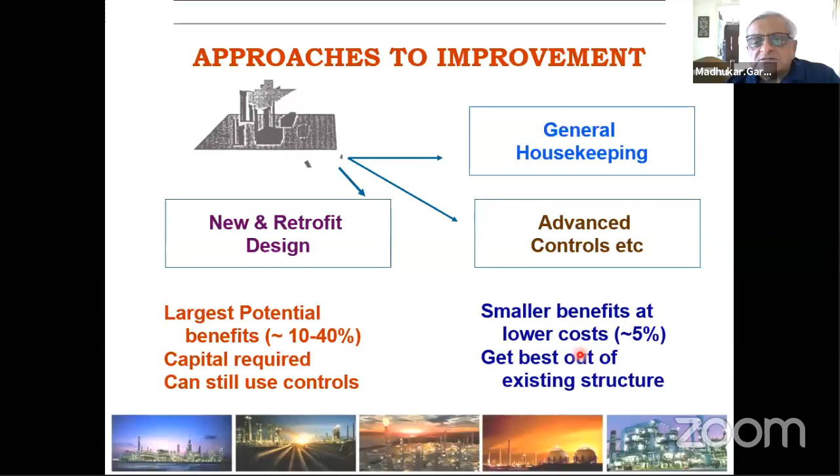Sometimes it might violate the max limit, which means the product becomes a little impure. For example, if you're separating benzene and toluene, benzene purity in the merchant market needs to be about 99.995% pure, so any small toluene ingress would make that product unmarketable.

So the operator generally keeps the set point pretty low compared to the actual limit, and is quite happy to let some benzene go along with the toluene. That's a kind of loss in production, which can be avoided by raising the set point if we have better control.

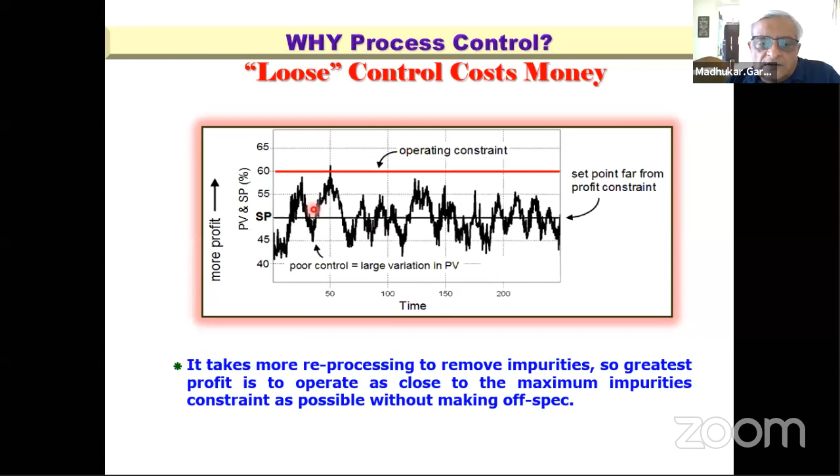So when I talk about control and advanced control, this is not just theory—it is something in practice, and more importantly, it gives money. At the end of the lecture, I will teach you how to calculate benefits of advanced control even before implementing it.

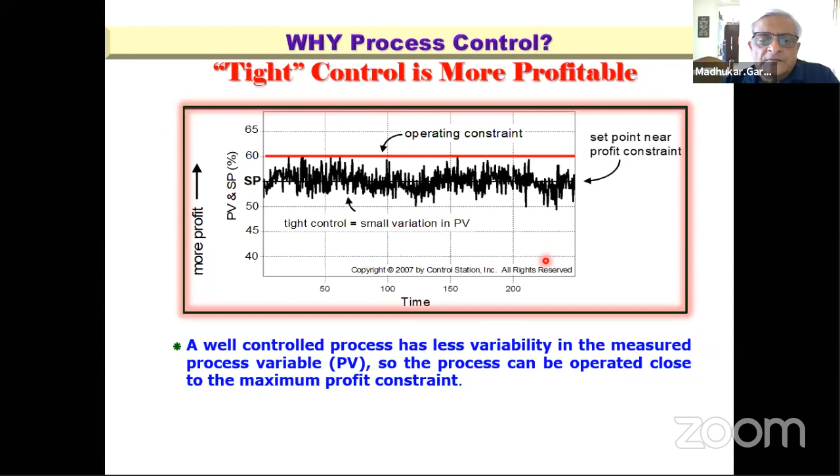Management generally likes to have an estimate of the cost-benefit ratio before approving a project—what the capex and EBITDA will be, and capex over EBITDA, which gives them an idea about rate of return and net present value. Normally that can't be done unless implemented, but the good news is you can calculate estimates before implementing advanced control, which I'll talk about later.

Today, all the control rooms in almost all industries, whether it is fine chemicals, pharma, and more importantly in refining and petrochemicals, are provided with DCS, what is called a distributed control system. But this has actually evolved over a period of time.

If you look at how control room instrumentation has evolved, up to the 70s, you'll be surprised to know that all the instrumentation in the control room was mostly pneumatic and panel mounted on the wall. These control rooms had a big wall on which the entire semi-graphics of the unit was displayed, and all the PID controllers were pneumatic, in the sense that the signal coming from the plant was a pneumatic air pressure signal, compared with the set point, and the output signal was also pneumatic air pressure. I'm old enough to have actually seen this happening.

Most refineries actually had a pneumatic control panel mounted system till the 70s or even late 70s, and I've even operated some plants using a pneumatic control system.

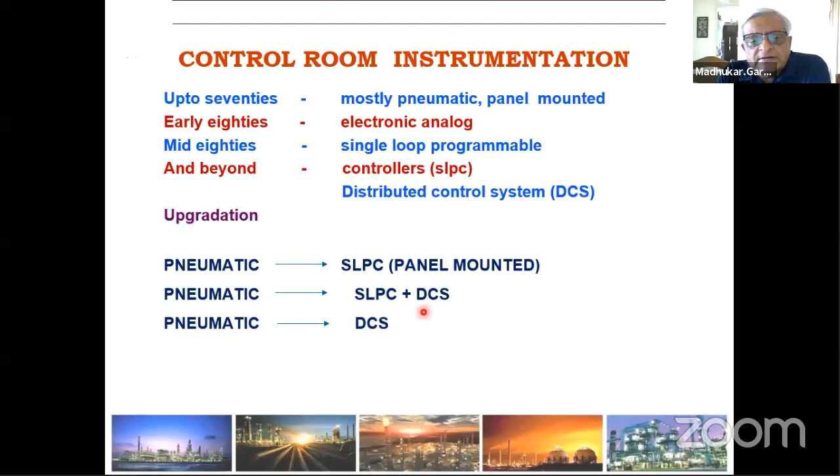Later on, as a new generation of operators started to come in, DCS was added to the SLPC, and today, as I speak, we have DCS.

So how it went about is that this is the field—this field is nothing but the plant. It could be any plant: a crude unit, vacuum unit, FCC, naphtha cracker, anything. From the field, you have four types of signals: flow, pressure, level, and temperature, which come in.

There are two types of control system in control room instrumentation. One is the open loop, where flow, level, pressure, and temperature are only indicated or recorded for the information of the operator. The second is the closed loop, where these signals come in, are compared with the set point, and the deviation or manipulated variable is sent back to the plant to operate a control valve. So, the control room instrumentation is either open loop like this, or closed loop.

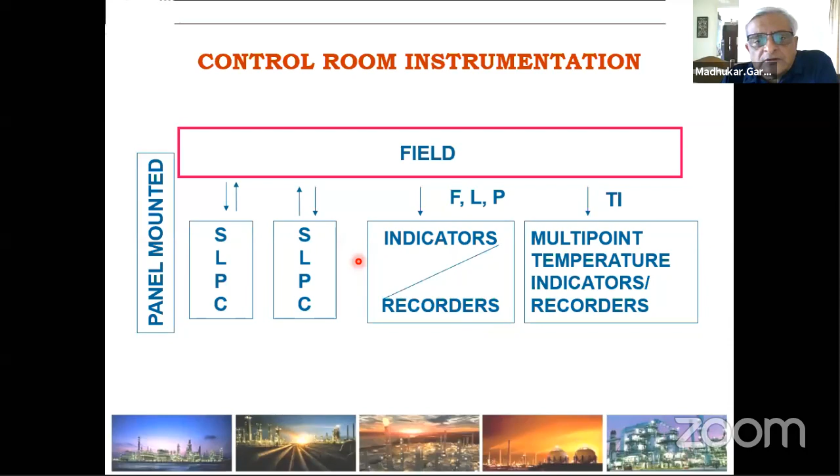This was the panel mounted first upgrade. Later on, this was combined along with the DCS, what we call the operating station. The operating station is very similar to a desktop computer. There's no difference, except rather than a simple PC, it is actually a workstation. Most of these are HP workstations with tremendous computing horsepower.

Feeding these operating stations is what is called a control station and monitoring station. The difference is that the monitoring station takes the open loop signal. So in addition to flow, level, pressure, and temperature going onto the panel, they are also fed into this monitoring station, which in turn feeds its data to the various operating stations.

Sitting in front of these operating stations are the operators who look at this data in various formats displayed to help them control and operate the plant better. The closed loop is actually piped through the SLPCs.

Into the control station, which contains the PID controller also. So to some extent there is redundancy provided. In case the control station goes down, the operator can still operate the plant through the SLPC, and that also feeds to the operating station.

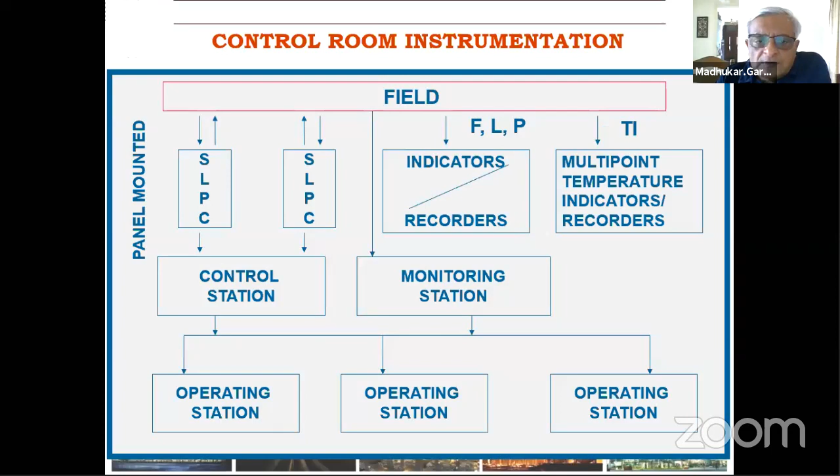This went on for quite a while. In fact, some refineries, including the two here in Mumbai, Bharat Petroleum and HPCL Mumbai, still have a configuration like this. But slowly they have moved to something like this picture, where there is no longer panel mounted instrumentation anymore.

The data from the plant is fed directly to the two stations, the control station and the monitoring station, as shown earlier, without the middle layer. That data is then sent to the operating station, and you can add other modules like an application module or a supervisory computer to that.

The control station now takes more responsibility, because if it goes out of order, there is nothing to fall back upon. So we provide a duplex control station, that is two CPUs in parallel. If one CPU goes down, the second takes over, with hot data transfer between the two. The on-time availability of the current DCS is measured in the fourth and fifth decimal, around 99.99995%.

The reason is that we can't afford any of it to blank out, because then the operator has no way to know how to operate the plant, and the plant can get into a dangerous situation. So it's important to remember that if the distributed control system had not been invented, there could be no discussion about advanced control, because advanced control sits on these operating stations and control stations.

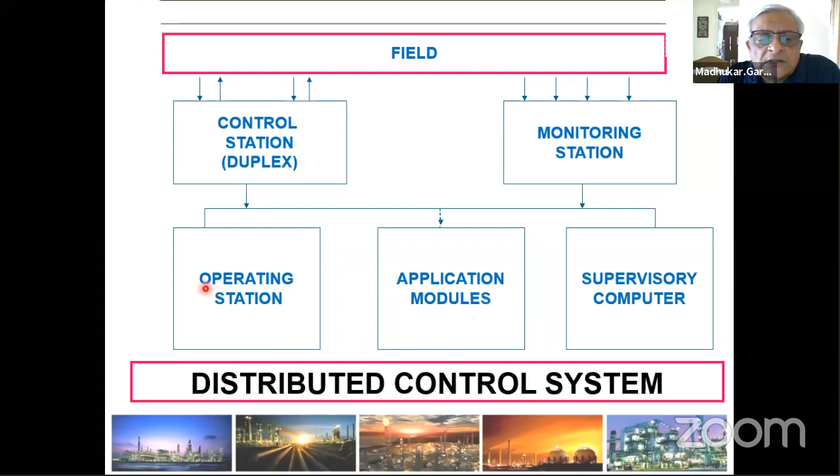What is the benefit of digital control, the way we saw it? Of course it has enhanced data accuracy, because now you have much more accurate data in real time. So if the temperature is 98.5, it will show 98.5. In the good old days, the operator guessed it was somewhere between 96 to 99. So the data accuracy has improved.

Very fast response time, because we're looking at electronic transmission from the plant to the control room and vice versa. Very easy access to plant data - you can actually record and store data for the last 10 years, and recall these files the way you recall files on your laptop or computer. So there is no need to keep track of ledgers, folders, or hard copies anywhere - this is all available electronically.

More important is that this media provides facilities for plotting, trending, and even storing process data. So if you want to determine the effect of one variable on another, you can transport the data into Excel and plot and trend it, or even do the plotting and trending on DCS.

To my mind, the most important advantage of digital control is the ease of control of configuration and tuning. What I mean here is that the plant is never steady. Over a period of time, it goes through revamps and modifications, and one of the modifications generally done is that we change the control system.

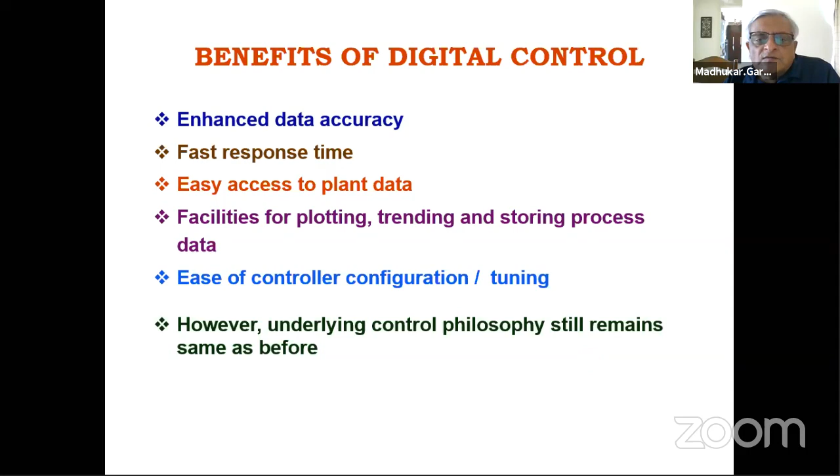And what is that? It's the age-old PID controller. PID stands for Proportional Integral Derivative Controller. Since you all know about it, I won't explain it fully, but let me tell you some of its major features.

You have a process which is the inherent part you want to control. Let's say this is a pipe, and this pipe is the process where you want to control the flow through it. So you have a measuring element, which could be an orifice plate or something, which measures the flow of the fluid, and that is the process variable.

The PV value, process variable or present value, goes into the controller, which is the PID controller. It compares the PV value with the set point given by the operator, and uses the PID algorithm. I don't think we have the time or the forum to discuss the PID algorithm in detail, but it uses that algorithm to calculate the manipulated variable move, which is downloaded onto the control valve, and the control valve opens or closes accordingly.

So if the flow is higher than the set point, the control valve will close, and vice versa. This is what's called conventional single loop control, and it has been around since time immemorial. In fact, since the first plant was constructed, the PID controller has been there. It's the major workhorse of anything that moves—whether it's a plant, a ship, or even an airplane. The PID controller is a workhorse.

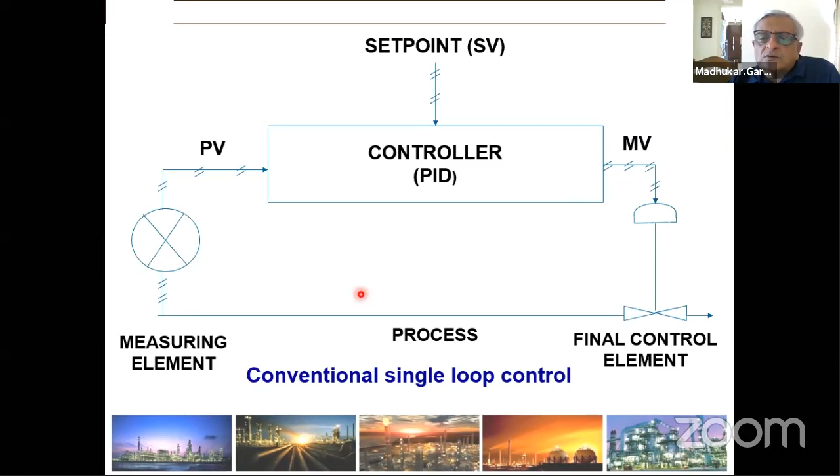Limits and constraints cannot be handled. For example, if the process variable is very low compared to the set point, the signal from the PID controller is to open the valve. Now if I keep opening the valve continuously, the PV value still doesn't reach the set point, and the valve is fully open. So this controller doesn't know that there's a certain limit beyond which it cannot open the control valve.

So such limit constraints cannot be handled. If there are significant time delays in either measurements or process response, it destabilizes the loop.

In other words, suppose I have an online gas chromatograph. By the time the sample goes into the coil and into the column, and by the time it actually enters the detector and the signal comes back, there could be a significant time delay. Now that is something that cannot be considered. It cannot be handled by a PID controller.

The other aspect is that it cannot handle interaction with other loops. It knows only its own process variable, its own set point, and its own manipulated variable. It doesn't know what other loops are doing, and obviously the plant is integrated, so any action by any other loop will affect this loop as well.

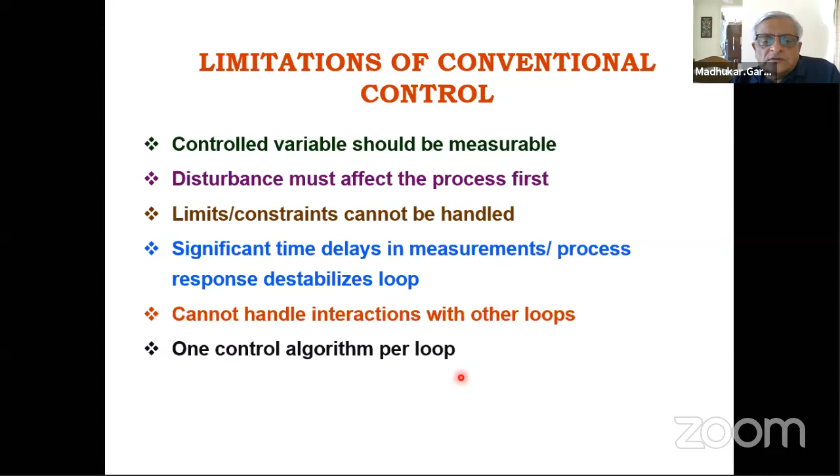So that's a big constraint, and as you know, inherently there's only one control algorithm per loop. So tomorrow, if I want to change the gain value, or if I want to make sure that the PID controller doesn't operate for some reason, those kinds of algorithms cannot be built into this. It will only operate at one algorithm at a time.

So given all these constraints, and knowing that the PID controller is a faithful workhorse, what is the next logical step that we should do? Obviously, since there is tremendous computing horsepower available in the DCS, the existing features can be used for control beyond conventional control, and that is called advanced control. So anything beyond a PID controller, even a ratio controller, is called advanced control.

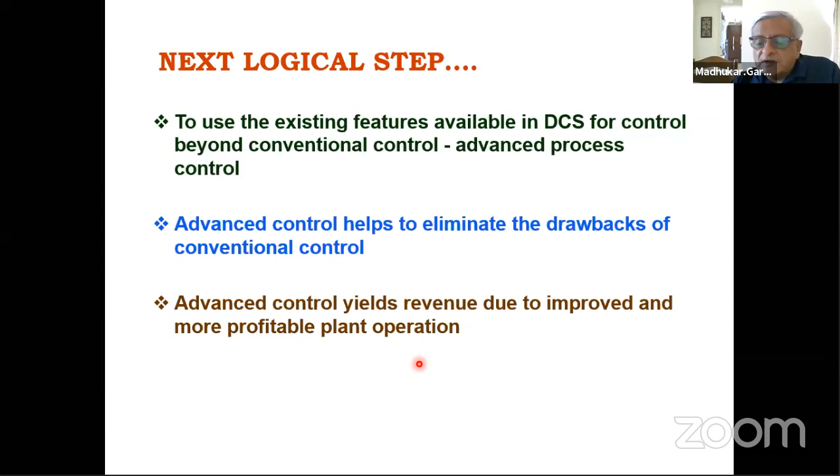It helps to eliminate the drawbacks of conventional control. Not only that, it helps you to make money. As I mentioned before, I will tell you how you can calculate benefits due to advanced control. In almost all cases, you can estimate the advantage of advanced control even before implementing it. Let me give you an industry scenario as to why advanced control is required and is a must in the industry today.

See, for example, even if you employ the most sincere operator, he will make adjustments 5 to 8 times per shift. Even if he's very dedicated, sincere and knowledgeable, it's very difficult for him to make more than 5 to 8 adjustments per shift in one parameter as what he thinks is best. This is underlined as per his perception, and this kind of adjustment can vary from person to person.

Obviously, there are 3 shifts in a day, so there are 3 different people in a 24-hour time frame. So from one shift to the other, the situation can change, and therefore you need something more consistent. Advanced process control fills that gap because it can adjust multiple parameters, not one at a time, but every minute, as per the agreed objectives to maximize productivity and profit.

What's important is that it is independent of the person. Whoever is sitting on the panel to operate the plant doesn't really matter, because advanced process control, based on the objectives decided by higher management, will always drive the plant to its maximum profit objective. This cartoon tells you the whole thing very succinctly.

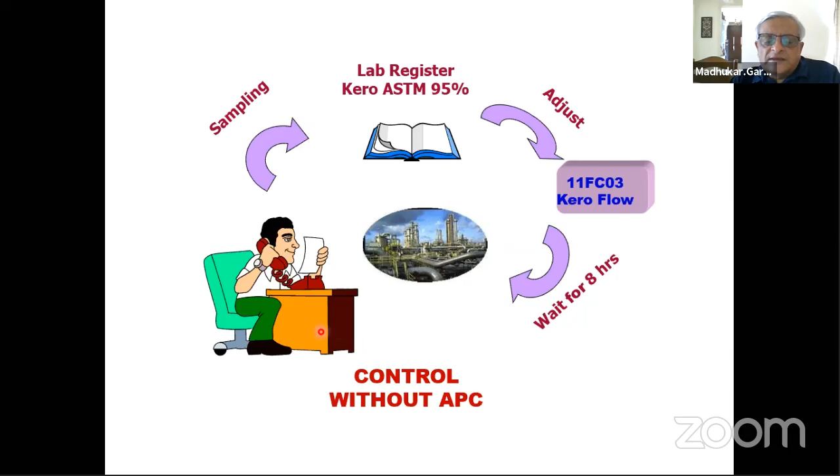Then based on that data, and what exactly the company wanted, the operator used to adjust operating conditions in the plant, and then wait 8 hours before the result was affected — whether the change made any difference — and then take a sample and send it back to the lab. And the loop closed. But today it's not exactly the same. Today, the Kero 95% point can be estimated; it cannot be measured.

There is no measurement device by which you can actually measure the 95% point of Kero, but it can be calculated online, and that can be displayed to the operator. Based on that, he can adjust the kerosene flow out every once in a minute, and this whole loop of having a lab, etc., is completely eliminated.

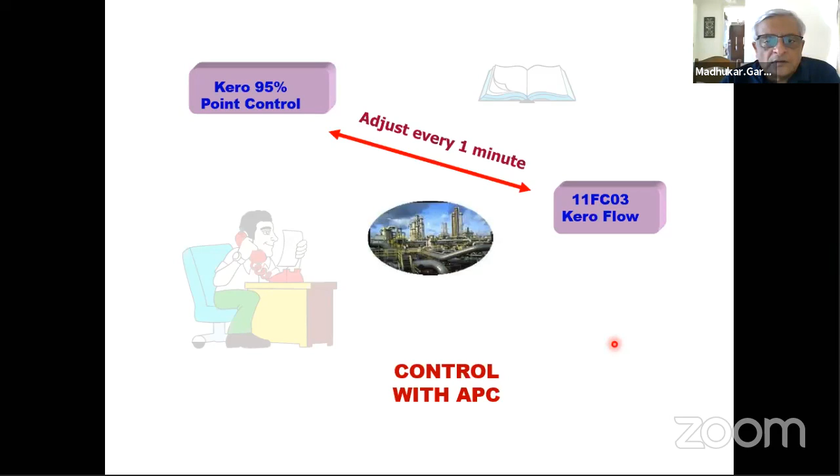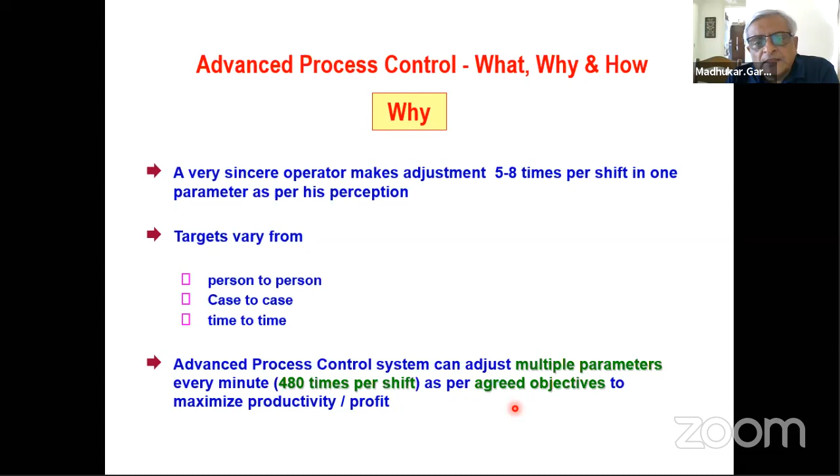This is actually what I call digitization in the real world in terms of optimal operation. Now, before I get into the nitty-gritties, I've discussed why, but now I'm getting to the what, and later on I'll talk about how. If you remember, there was a slide where we said what, why, and how. I think very important is why, and I hope I've convinced most of you that advanced control is a necessity rather than a fashion. After convincing you on why, then we talk about what, and then how.

So when you are actually operating a distillation column and you're trying to control the overhead temperature, the pressure, etc., what exactly you're trying to control is one or more of the chemical engineering operations in the plant. It could be either a mass balance, a heat balance, reaction kinetics or reaction engineering, or vapor liquid equilibrium, or a combination of them. So it could be thermodynamics or catalysis or kinetics, heat balance or mass balance.

And these are all the subjects that we teach and we learn. This is actually what defines chemical engineering to a very large extent. So please always remember that whenever we try to control these 4 variables, we are actually trying to understand the chemical engineering background in that process and trying to control that part.

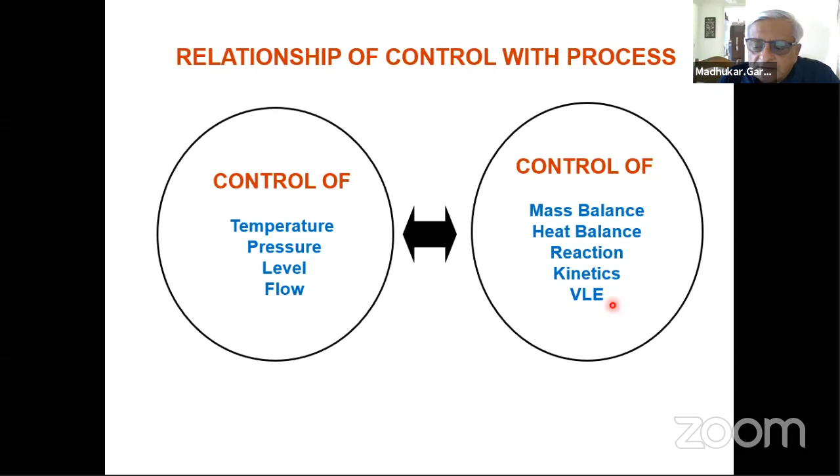And having understood that, now let me tell you what is advanced control. Advanced control actually comes in multiple layers. Right at the bottom is the PID control system, the regulatory control system that we talked about. That is a single loop control. And then above that is the advanced control system, and I'll talk about that in greater detail during my presentation. Advanced control comes in different flavors, and I'll talk about that in a moment.

But the advanced control layer, what I would like you to remember, is that this advanced control layer sits on top of the PID control. It doesn't actually substitute that. It's very important. So we do actually respect and honor our good old working horse, the PID controller. We don't ever allow any control system to bypass the PID controller. But now the set point to that PID controller is being given by the advanced control system rather than by the operator.

And over and above that could be a unit optimizer, where, in addition to advanced control in the unit, you would have an online optimizer, which is something like optimizing the process at a steady state. So it looks at various other parameters like profit and utilities and so on, and decides what could be the way this plant should be operated. And it actually takes it from one operating window to the other.

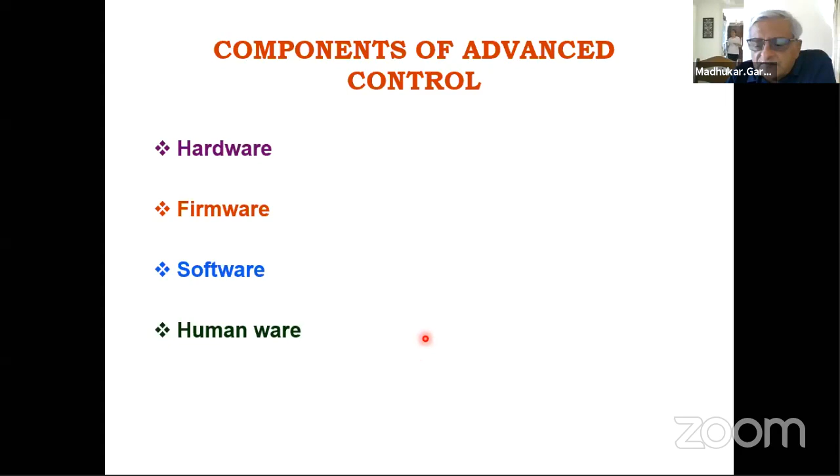Because in an actual operating plant, the operator has always different views as compared to his boss, and then the technical services sing a completely different song, and they're always actually at daggers drawn. I mean, they may like each other personally, but sometimes they don't even like each other's views. So if you have to make it successful, you have to carry everybody and be able to understand the views of everybody. So I cannot go for too long, but just to tell you that the human aspect, the manpower aspect of implementing advanced control, is perhaps ten times more important as compared to the advanced control software itself. Now, advanced control actually consists of three very important layers.

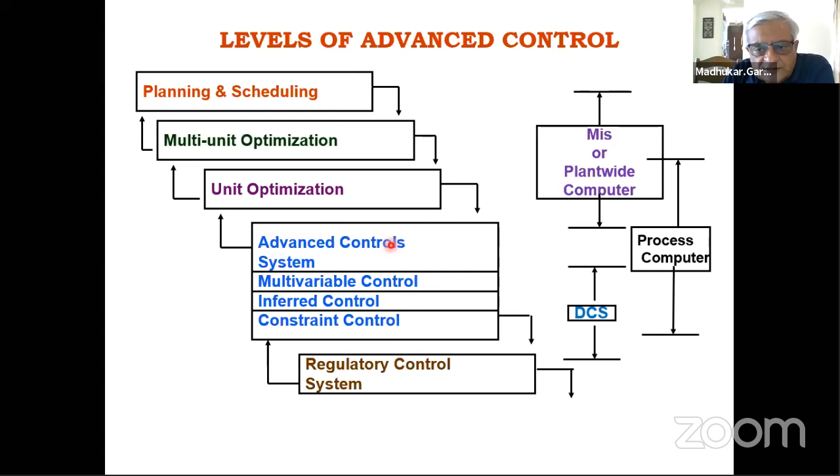One is what is called conventional advanced regulatory control. It's a bit more advanced than the PID control that we talked about. Generally, this layer is not required nowadays, friends. People go directly to multivariable advanced control. But I've kept it in this lecture because I would like to talk about three conventional advanced regulatory controls, to give you a flavor and an appreciation of what exactly multivariable advanced control does. And then, of course, the online optimizer, as I showed you in this picture, this unit optimization. Today we'll have time enough to talk about conventional advanced regulatory control and multivariable advanced control, and at some stage in the future I can talk about online optimization as well.

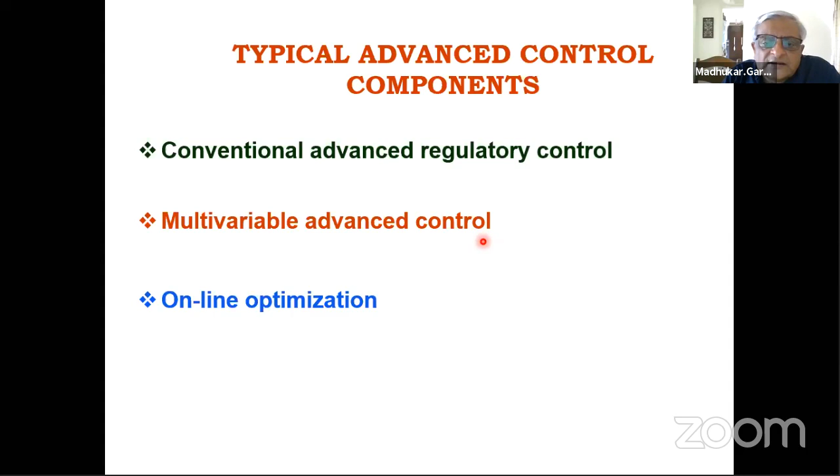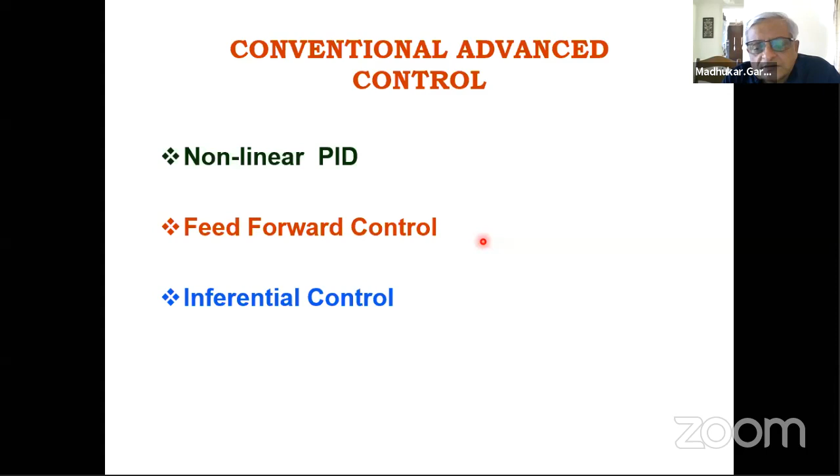So let's begin. Now we are talking about going from what to how. We have discussed why, we have discussed what, and now we are going to talk about how. The how part is the conventional advanced control, as I said before, and that is part of the total advanced control components I talked about. There are three concepts I would like to introduce you to. One is called nonlinear PID, nonlinear proportional integral derivative controller. The second is feed-forward control, and the third is what is called inferential control. When I say that today we only implement multivariable advanced control, what I mean is that all these three concepts are actually built into this multivariable advanced control. And therefore, for you to understand and appreciate multivariable advanced control, it is important to understand what these three are. They are actually the foundation of multivariable advanced control.

Let's talk about nonlinear PID control. It's generally used for level control. So let me give you a situation. I know this is a virtual class — if it were an actual class, I could have stood at the board and drawn a diagram, which I always do when I give this lecture. But let's say you have three components in the feed: benzene, toluene, and xylene, which you need to separate in two distillation columns.

In the first distillation column, you take the benzene to the top, and then the toluene and xylene go to the second column from the first column's bottom. The second column distills out the toluene from the top, and you get xylene coming down from the bottom of the second column.

Now, if you look at the level control of the first column, since the level is cascaded onto the flow at the bottom of the column — the bottom stream that goes as feed to the second column — and since it's a tight level control, suppose the set point is 50%: if the level goes to 55% for some reason, it will start increasing the flow, and vice versa. That is fine as far as the first column is concerned. But if you look at the second column, that column gets disturbed, because this level controller is continuously changing the feed to the second column, and the second column gets disturbed all the time.

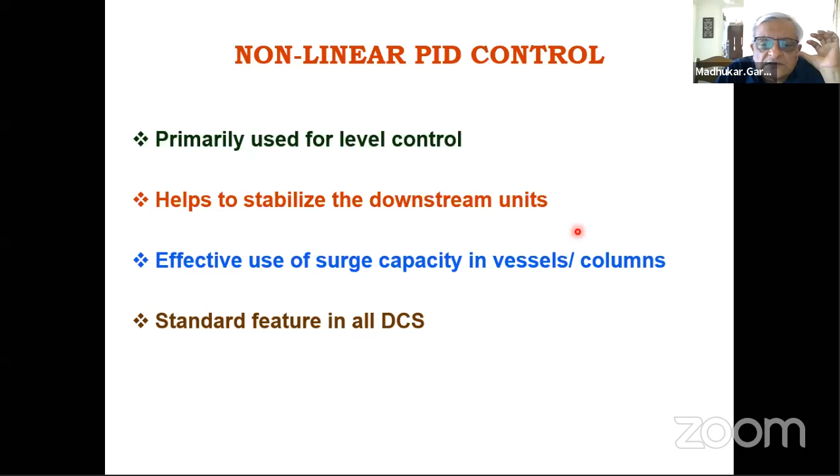What I mean here is that, this is how you show the PID gain. So let's say this is the gain of the PID controller, and between 20% to 80% level, we try to reduce the gain.

As you know, the PID controller algorithm has gain times open bracket 1 plus 1 upon tau integral, integral epsilon dt, plus tau d into dE by dt, d epsilon by dt, where epsilon is the error between PV and SV.

So what happens here is that by reducing the gain, we are actually detuning the controller. Between 20% and 80%, it will not take any aggressive action to open the valve. But above 80%, the slope of this line goes up, meaning the gain goes up, so it will take more aggressive action because it might flood the tray above. Or below 20%, you can take even more aggressive action because we don't want the level to go down too much, otherwise it might lead to cavitation of the pump at the bottom of the column.

In many cases, you can even make the gain zero during 20 and 80. So the level is at 50, let it keep going to 55, 56, 58, 70, and we still don't change the flow coming out of the bottom of the column, so that we are using the surge capacity at the column bottom.

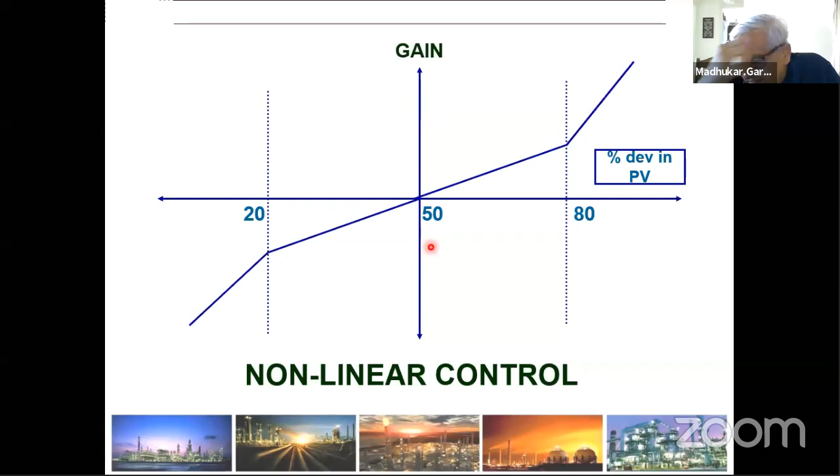So this is in essence a nonlinear PID control, and this is very handy in many applications.

The second advanced regulatory control is feed-forward control. As you'd remember from your process control course, this is the set point, and this is the process variable coming in. You take the difference between the set point and the PV, the error, which I mentioned as epsilon in the PID algorithm earlier. That error goes into the PID algorithm, and what comes out is the manipulated variable.

Now this is added or subtracted from the signal coming from the disturbance, and this is what is called feed-forward control. So if there's a measured disturbance, you can predict its impact on the process and compensate for it in the manipulated variable move, so the process doesn't get disturbed because of this disturbance.

Let me give you an example. Just visualize a furnace heating a fluid, it could be crude oil, it could be anything. Basically in such a system, you fire the fuel and control the firing based on the coil outlet temperature, the temperature of the fluid coming out of the furnace. Now the fluid coming into the furnace, its temperature can vary.

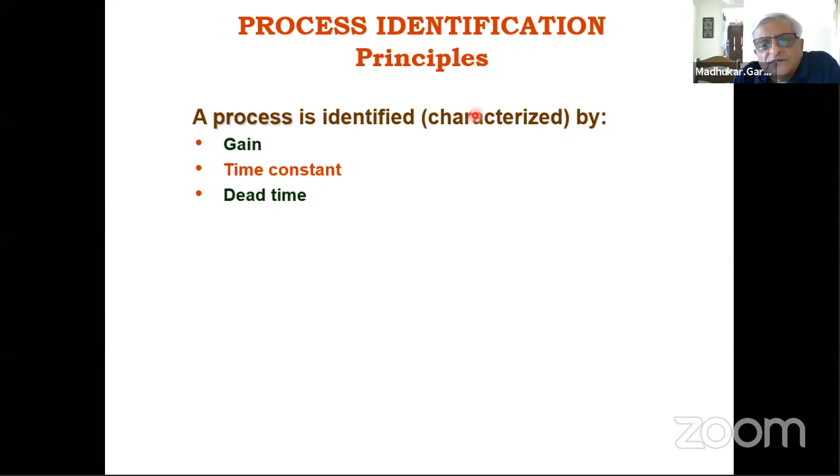Let me explain. I don't think this needs much explanation, but this particular case tells you how to calculate that. And I'm spending more time here because this is a very essential component of multivariable advanced control. So let's say you are taking cooling cold water at 30 degrees, heating it in a vessel which has steam coils inside, and the hot water comes out at 60, with steam flow at 200 kg per hour.

At a certain time, if you increase the steam flow to 230 kg per hour, that means there is more heating now available in this pool of water, so the water going in will get heated up more. The same temperature water will get heated up to, let's say, 68 degrees Celsius at steady state.

So when you make a step change from 200 to 230, this hot water temperature will go up and slowly steady out to 68. When it reaches steady state, the final value of this temperature, that is 68 minus the original, upon 230 minus 200, which is the change in steam flow, is the gain of the process.

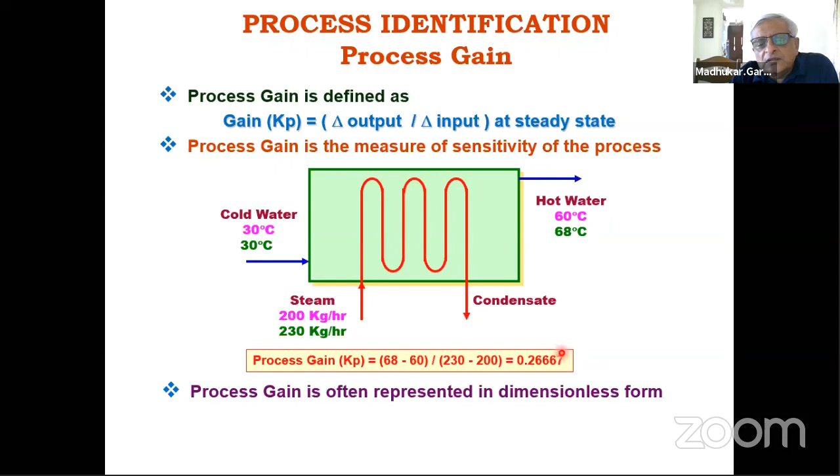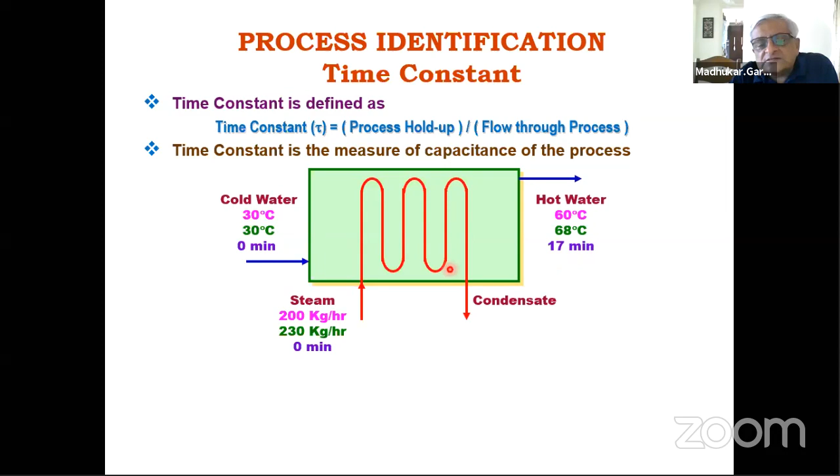The second is the time constant. The time constant is nothing but the process hold up, that is the volume of this vessel upon the flow through this vessel. In this case it is 17 minutes, and this is your first order time constant.

And the dead time is the amount of time it actually takes to register the change. So it is the transportation lag, and this is the length of the pipe upon the velocity of the fluid.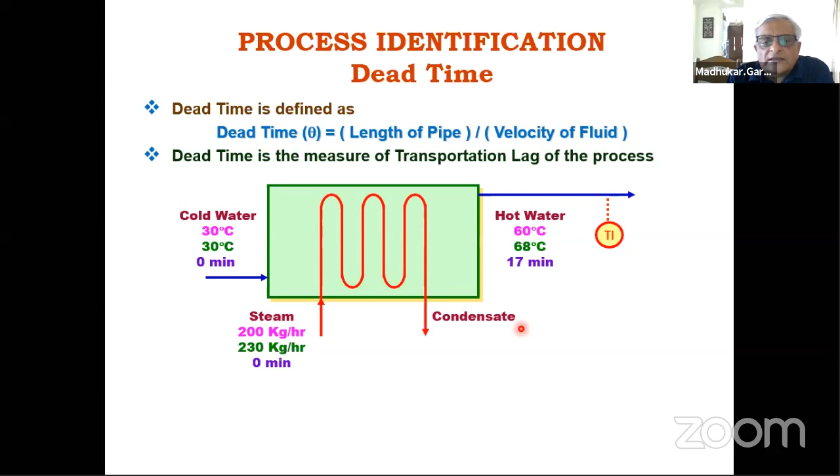The more accurately you can model the process, meaning you can identify these three constants, the more accurate you would be in terms of your control. And remember, although we are modeling this, this is the lead lag block.

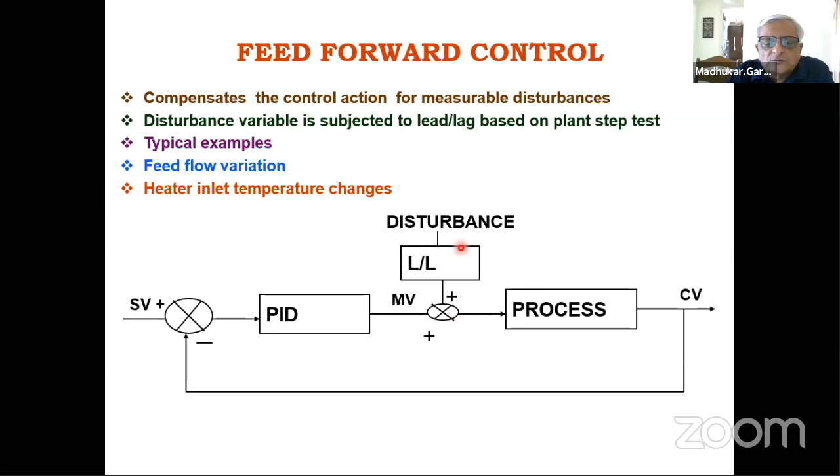This is Kp into e to the minus theta s upon 1 plus tau s. And beyond that...

The third advanced regulatory control is what is called inferential control. If you remember, I mentioned one of the limitations of regulatory control is that the control variable should be measurable. Now, what happens if the control variable cannot be measured? We need to calculate it. And the good news is that it is really possible. A lot of such variables can be inferred and calculated from the operating conditions by applying the general theory of chemical engineering, that is heat and mass balance.

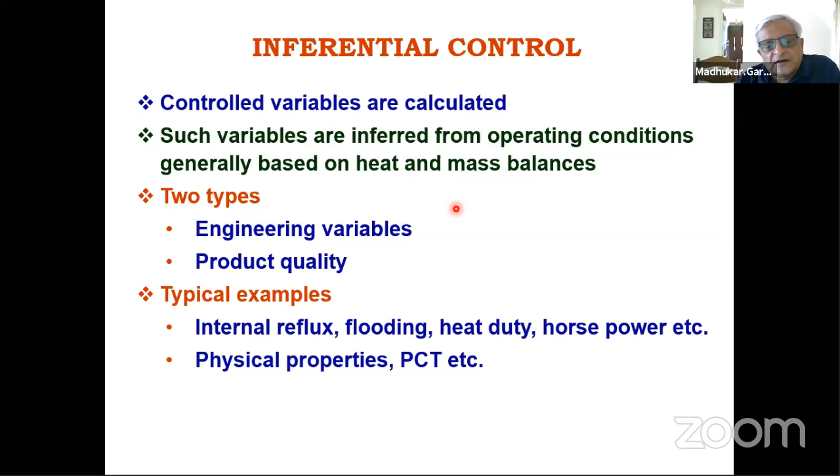These variables can be divided into two categories: one is engineering variables, the other is product quality. Product quality like compositions or vapor pressure, and engineering variables like flooding in a distillation column, heat duty, horsepower, and so on. The examples are given at the bottom.

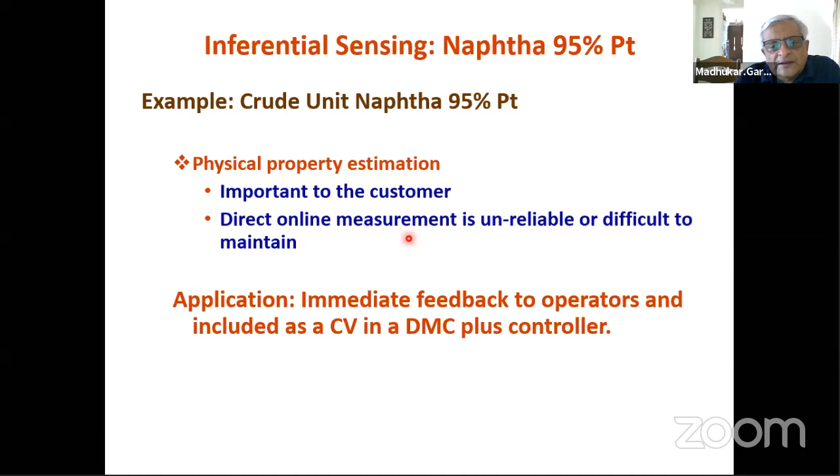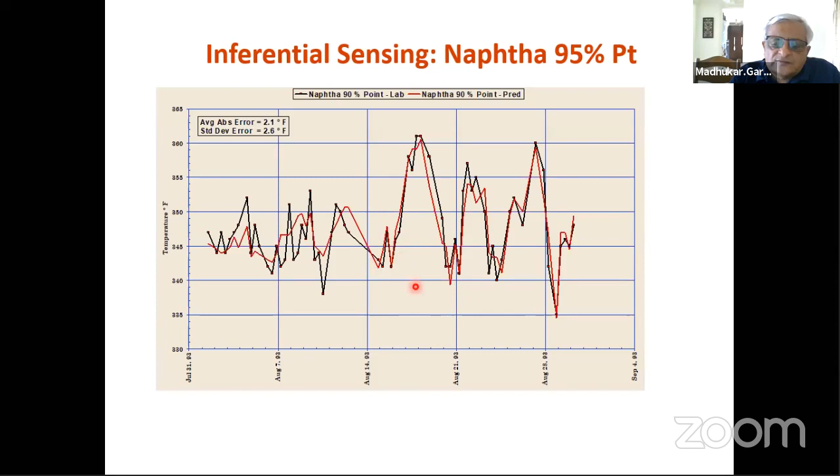This is the 95% point. The black data is the lab data, and the red data is what we predicted. You can see it's not too bad in terms of red and black following each other. So to a large extent in our refineries we do this, and once in a while we check the accuracy of this prediction by lab data, and we do a kind of self-adaptive tuning.

Now, having discussed advanced regulatory control, let me come to discuss multivariable model predictive control. This will now become very easy for you to understand. This is the state of the art, and let me tell you why we want to discuss advanced regulatory control.

Although conventional advanced control is good, it is easy to understand. All applications can be done within DCS. People just need to understand the background process, and the implementation time can be extremely short. And the good news is that it can be done in stages.

You can do nonlinear compensation, and then at some stage you can do feed forward. I've done a lot of these implementations myself, sitting on the panel, taking the operator into confidence. And when it works, even these small, simple things, the happiness and pride you get out of it, with a happy face of the operator, is worth remembering. So this is something I would suggest the faculty take initiative and do it in the small chemical plants we have around Mumbai, Vapi, and the Gujarat area.

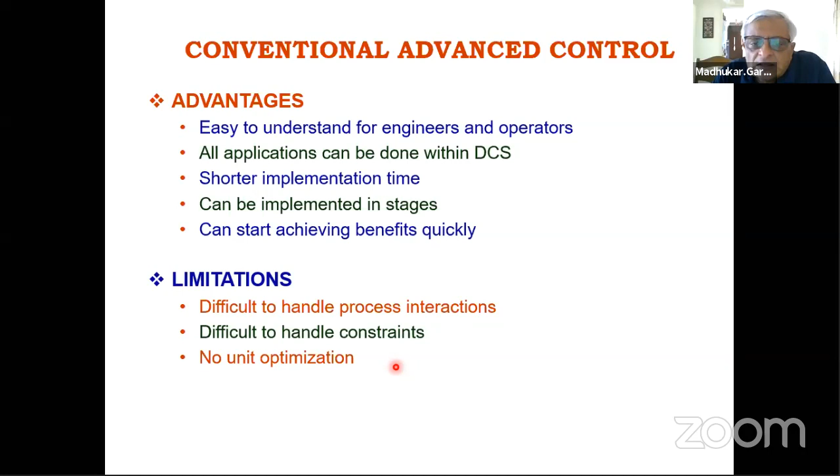The limitation is that it is still difficult to handle process interactions - you still have one algorithm per loop. It's still difficult to handle constraints, and we are still not optimizing. In other words, we are still not trying to make real money because we are still trying to stabilize the plant operation. So that brings us to the state of the art in advanced regulatory control, what is called multivariable model predictive control.

It can do everything excepting boil milk. It can handle all the difficult control problems, whether it is an inverse response, a time delay, several loops interacting, limit constraints on both manipulated variable and control variable, and more importantly, it can handle a non-square system. For people not exposed to multivariable model predictive control, they will perhaps not understand what a non-square system is. But let me tell you what is inverse response.

Let's say, for example, in a boiler, in the water vessel feeding water to a boiler, when you increase the steam flow out of that boiler, the level should go down. But actually it doesn't happen - when you increase the steam flow from a water boiler, the level will actually go up, and after a while the level comes down. The reason is that when you draw more steam from the boiler, more steam bubbles are formed, which occupy the space in the water pool, thereby giving a higher level.

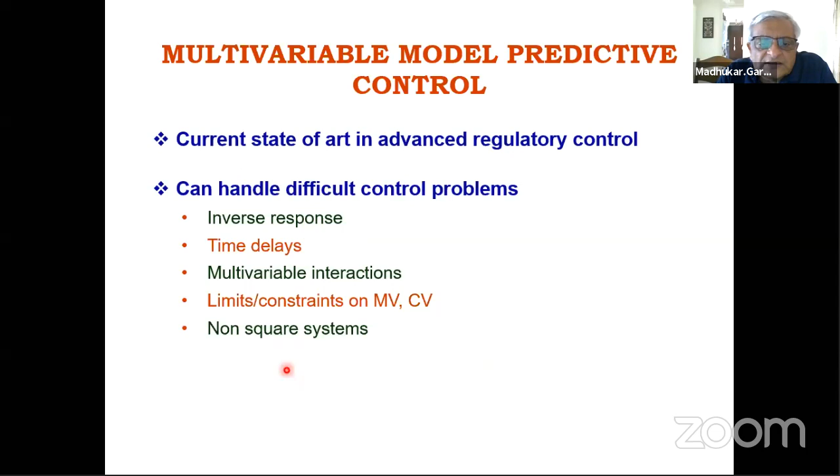And once those bubbles burst through the water liquid level and go into the steam flow out, the level subsides, and then actually you bring more water in to make up the level. So that is what is called inverse response, and I'll define what is a non-square system in a moment.

But before I do that, I'd like to introduce some definitions. There are four definitions around any control system that you can think of. We have already talked about what is manipulated variable and controlled variable. Manipulated variable is something which you actually change in the process, like a control valve, or a control variable which you want to control at a set point. But there are two more variables which have to be defined when we talk about multivariable process control, and that is disturbance variable and constraint variable.

Disturbance variable is something which you can measure, which actually affects the process, in terms of what I introduced to you when discussing feed-forward control. Disturbance variables which you cannot measure, I don't think you need to worry about, because the feedback loop of the PID controller will take action. Something like ambient air temperature and ambient humidity, etc. If you're smart enough, you can even feed forward that as well, but this could be considered an unknown disturbance.

But the constraint variable is a process output which need not be actually controlled at a set point, but within a limit or a zone. So let's say horsepower. We don't actually control the horsepower of a motor at a certain value. As long as it doesn't exceed 450 horsepower and doesn't go below 300 horsepower, we are fine. So that is the kind of constraint variable.

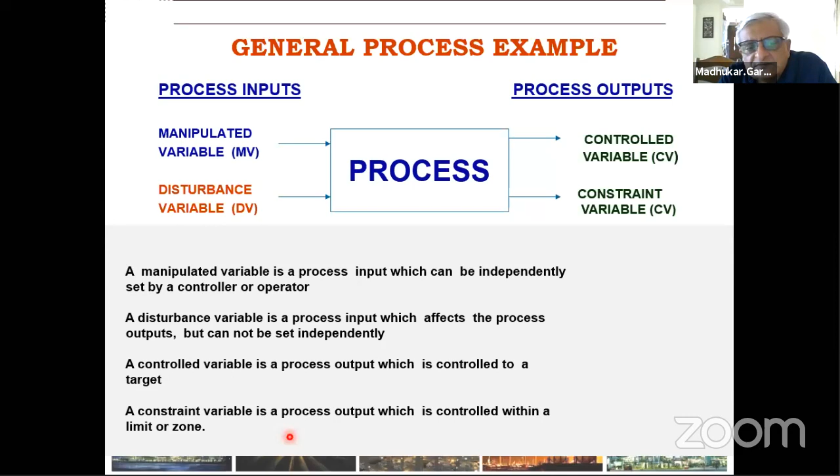So if you remember this, we already talked about MV and CV, but if you remember DV and CV as well, then we can actually define what is multivariable control. Just to tell you, like when I mentioned multivariable interactions, this is a very simple example which will tell you how two loops interact.

This is a simple distillation column, and you have reflux, which is controlling the overhead temperature here, and the reboiler, which controls this temperature. Now what happens is that if you actually increase the reflux, it will not only change this temperature, but it can change this temperature as well, because more liquid comes down.

And similarly, if you put more steam through this reboiler, it will change T2 for sure, but it will change T1 as well. So both reflux as well as the vapor boil up do have an impact on the two temperatures that we want to control.

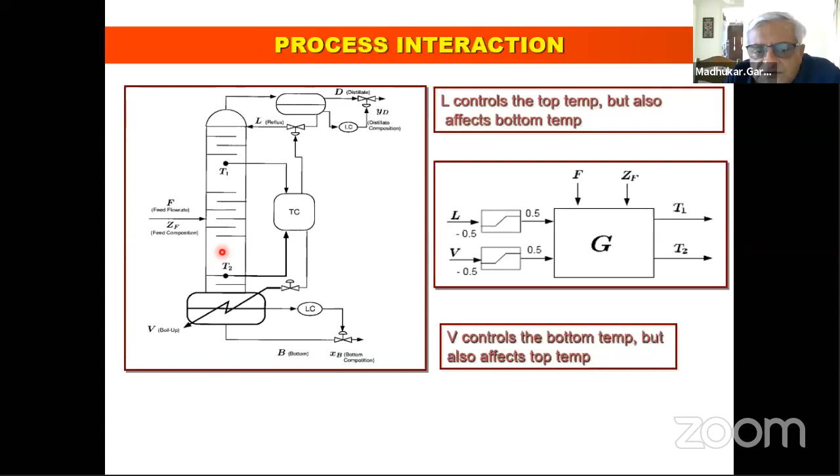Superimposed on that is the change in feed flow and the change in feed composition. So this could be a known disturbance, and if you don't have an online analyzer, this could be an unknown disturbance. And the flooding in this distillation column could be something which is a constraint variable, which you would like to limit between two limits.

So going from there, this particular diagram explains what I actually mean by multivariable model predictive control. Believe me, you don't need more than this one diagram to understand what is multivariable model predictive control.

So let's say in this case, same distillation column that we are looking at, there are three manipulated variables. One is the reflux, the second is the steam flow in the reboiler, the third is, if there's a partial condenser at the top, the control valve opening on that partial condenser. And the control variable is the overhead temperature, the second control variable is the bottom temperature, and the third control variable is the column pressure. And there's a disturbance variable in terms of feed flow.

So what we need to do is that in the actual plant, in this distillation column, we have to first of all assume that each one of these four variables, MV1, MV2, MV3, and DV1, actually affect all three control variables. So we take one at a time. We do a step test on MV1 and develop the relationship between the change in MV1 with CV1, CV2, and CV3. And this is the same relationship I mentioned earlier, that is the gain with the dead time and a single order response.

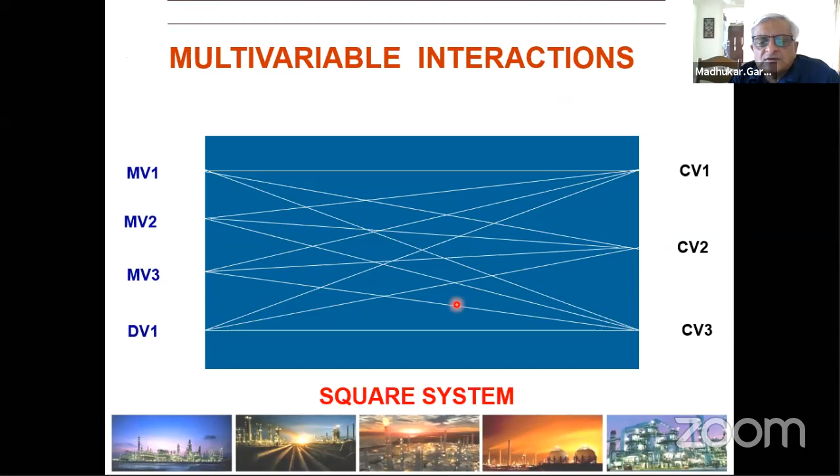If you have to simulate a distillation column, you have to use your domain knowledge to actually tell it how many trays, what is the reflux, what variable to fix and what not to fix, and so on and so forth. That is what I'm trying to explain, how to program that multivariable control.

So the implementation methodology is very simple. You make a list of all the controlled variables, manipulated variables, and disturbance variables in your entire process, and then take one MV at a time and do a step testing. Based on that, you record the changes in the CV value. That is what is called a deviation variable from the set point.

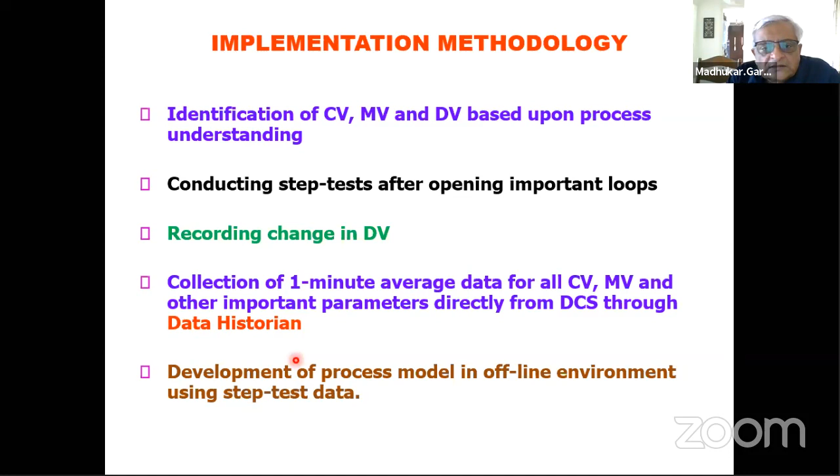If you look at the real life problem, this is not exactly a full problem. This is a typical glimpse of a crude distillation column multivariable controller, where you have something like 29 controlled variables, including constrained variables and manipulated variables. This is actually a pretty docile example. In fact, in our implementation, you could run into something like 100 manipulated variables with 300 controlled variables.

These graphs that you see are the process response curves. You'll see a lot of blanks here also, because that shows that manipulated variable 3 had no effect on control variable 1, 2, 3, or 4. So there'll be a lot of sparsity in this matrix, obviously, because some variable may not affect anything else.

So you could even have, let's say, you would never have a kind of a blank row. A manipulated variable, if it is there, it would be affecting something, of course. This is the matrix which you actually take a transpose of. So if you call this X, then you take X transpose X inverse X transpose, and then multiply that by the deviation between the PV value and the set point, and you got your controller.

So delta MV, which is the vector, is equal to X transpose X inverse X transpose of that deviation variable. And the X is nothing but this matrix, which is nothing but theta e to the power minus theta s into gain upon 1 plus tau s. So all these graphs are actually approximated that way.

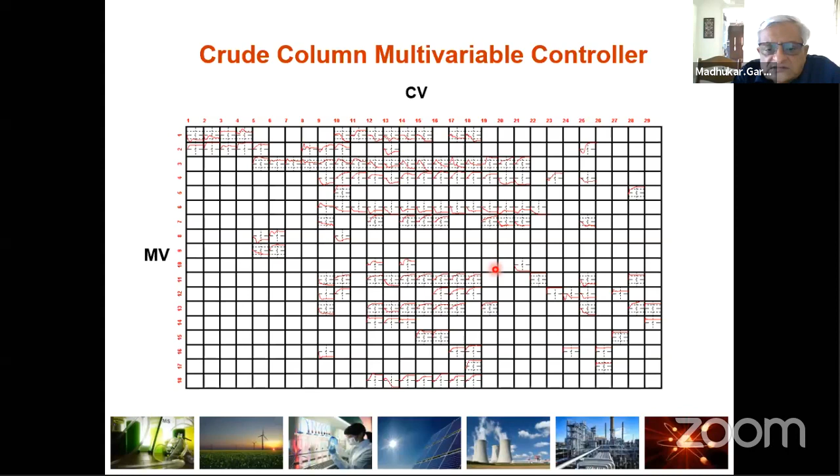So the benefits of advanced control are of 2 types. One is very easy to quantify. Because of advanced control, you can increase capacities, that is throughput and yields. You can have higher operating efficiencies. You could improve product quality and consistency. Obviously and definitely, you will reduce energy consumption and get smoother response to operational changes.

So tomorrow, if you get a different crude in your refinery, having advanced control will very smoothly shift the operation from one crude to the other.

There are other types of benefits which are very difficult to quantify, but nonetheless they are there, and we call them intangible benefits. They are increased safety. Advanced control gives you much higher safety because now it takes care of your metallurgy, and the safety issues are inbuilt into the algorithm that I mentioned earlier.

Reduced emissions because it is less energy consumption, greater flexibility of operation, better insights into the process. The operator now can talk in terms of horsepower of the pump and flooding in a distillation column rather than the delta P across the distillation column. And this has actually become the base for the management information system.

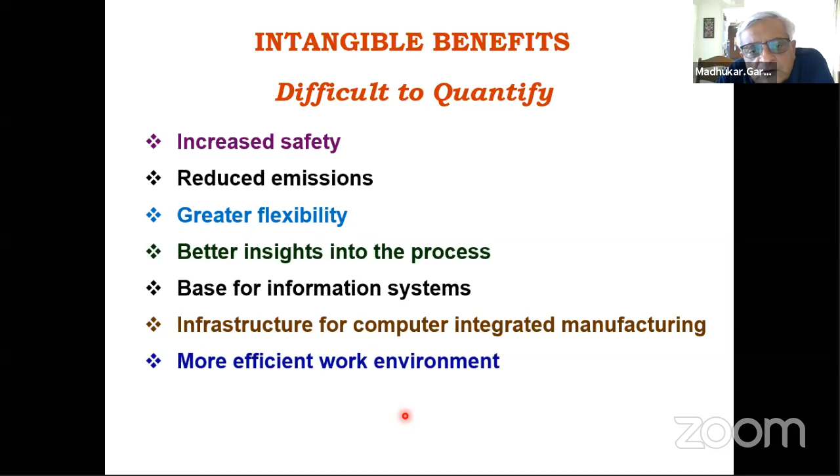Beyond that, it's much easier to actually go for a digital twin. Today we talk about digital twins, so it's very easy to graduate to integrate a digital twin of the process and make it work. You have, in general, a much more work-efficient environment where the operator doesn't have to worry about not going to the washroom just because in those 5 minutes the process may go out of hand.

Those benefits are easy to quantify, and I'll tell you how to estimate them. I'll finish in the next 5 to 6 minutes, but this is a very important piece because it gives you a satisfying feeling of how to estimate benefits due to advanced control, even before implementing it.

It goes with the premise that before advanced control, you had a large variation across the set point, and after advanced control, these variations go down. In other words, the standard deviation of your PV value around the set point was large, and after that it reduces, which helps you move the average much closer to the specification limit.

Let me give you an example. In our refineries, like in your kitchen, you use LPG. The liquefied petroleum gas you use is actually a mixture of propane and butane, C3 and C4. Inevitably, some amount of C5 can also get in because you're separating LPG from naphtha, and the lightest component in naphtha is C5. So some amount of C5 will go in.

So if this is the C5 specification limit in LPG, let's say it's 1%. Now, the way the operator operates the naphtha stabilizer, which is actually a debutanizer separating LPG from naphtha, he might violate the LPG spec a couple of times, but it doesn't matter because the entire LPG goes and gets stored in a bullet or a Horton sphere, and then it gets mixed together because there's a big volume difference here.

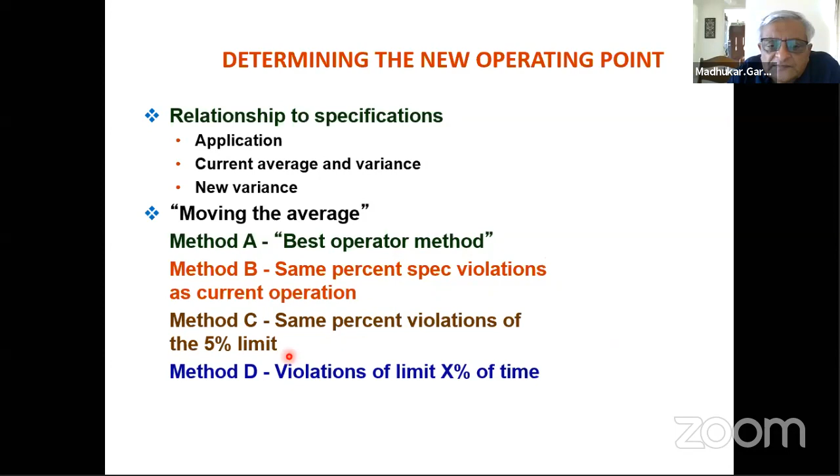But before I do that, let me tell you this is the standard observation we see in terms of reductions in standard deviation. You remember I mentioned that we have to believe the standard deviation in the process variable, in this case the C5 content in the LPG, will reduce after implementing advanced control. To what extent can it reduce? Remember, we have still not implemented advanced control.

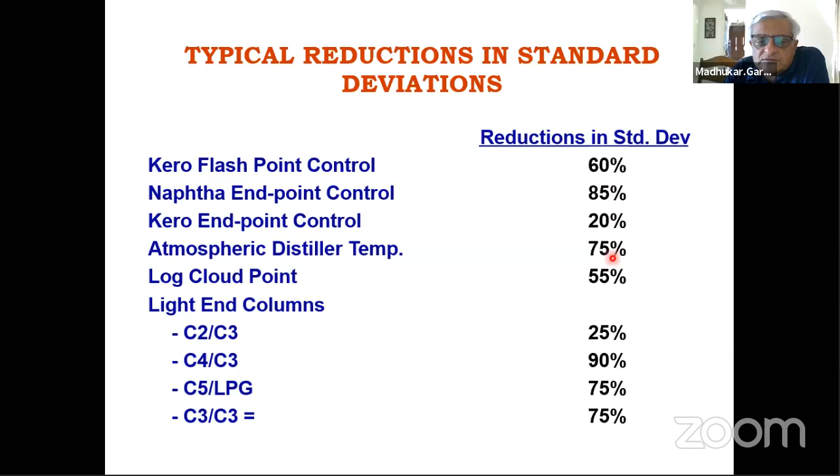But these are the industry standards. Like if you're trying to control Kero flash point, the standard deviation is reduced by 60%, and so on and so forth. These are the typical industry averages, and the next slide also shows roughly about 60%. So a good industry number to estimate a reduction in standard deviation is 60%, and you can never go wrong with that.

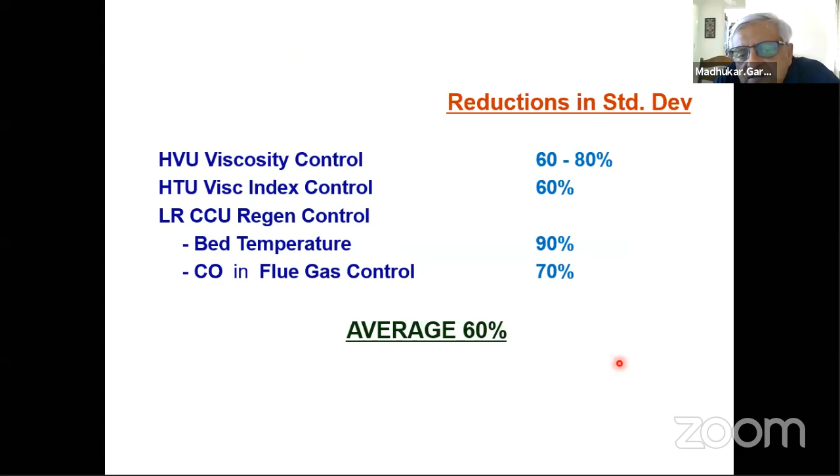Okay, so let's say if the standard deviation before advanced control was 3, you can reduce it by 60%, so it becomes 1.2 after advanced control.

That is the variable which you want to control. So in this case, in our LPG case, it is C5 content, and what we have is number of samples. So if you actually plot that number of samples versus the C5 content, you will find that it has a very broad distribution because the standard deviation is high.

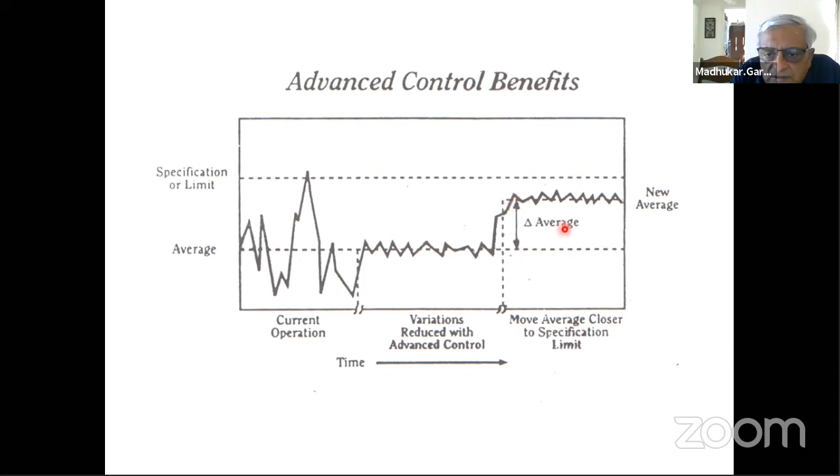So this is how actually you calculate. So let's say if I shift from 0.5 to 0.8 or 0.95, I can do a simulation on Aspen to understand how much more LPG I will make. The way to do it is by reducing the reflux to the distillation column, and then see how much less naphtha we will make. So the difference in the pricing between the LPG and naphtha, into the total production of LPG per hour, into 8,000 or 8,200 hours in a year.

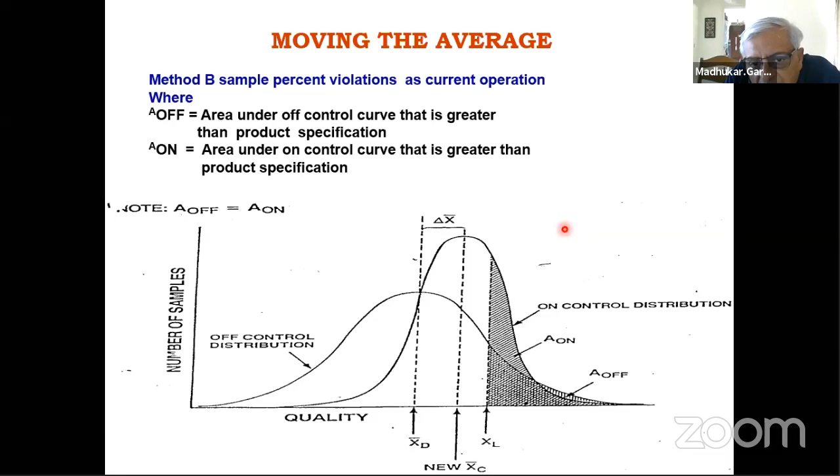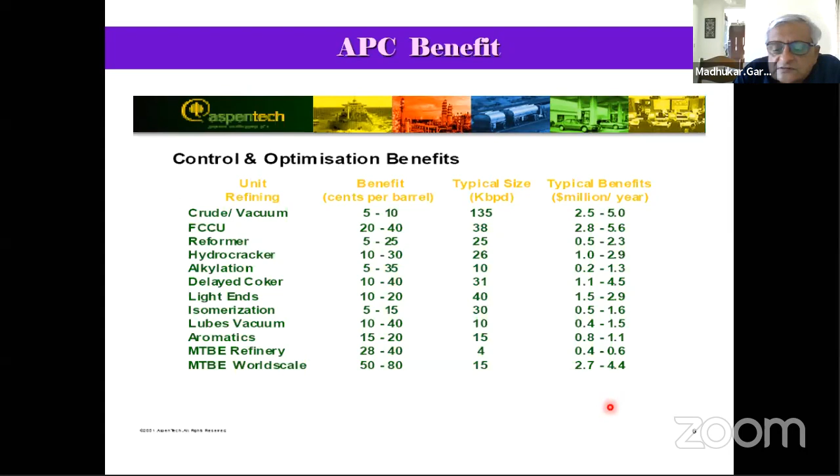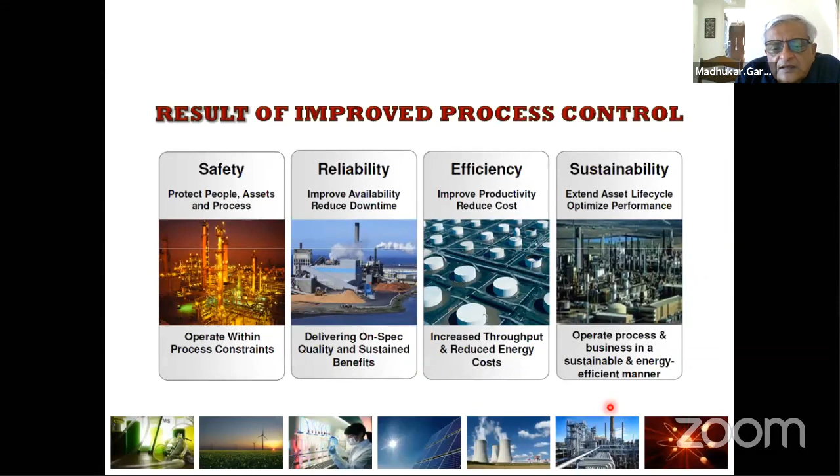So that's it I had to talk to you about. And if you have any questions, please do let me know.

Thank you for your informative presentation. I'll just see the questions. Many more appreciations from our participants, very interesting session, informative presentation, sir. One question is from Chandra Kumar Mohor. I can't hear you, can you speak a bit louder? Let me see if I can increase the volume here. Yeah, my volume was a bit low. Yes, sir, tell me. Many more appreciation came from our participants, very interesting session. Now, one question is coming from Chandrakumar Mohor.

How does logic controller and transducer work in controlling process parameters? See, what happens is that when you have a full control loop going from the plant to the control room and back, it starts with the measuring element. So whether it is pressure, temperature, level, or flow, you have to put a transmitter. Let's say you're measuring the flow, so the hardware is the orifice plate, and across that orifice plate you measure the delta P, and then you take the square root of the delta P.